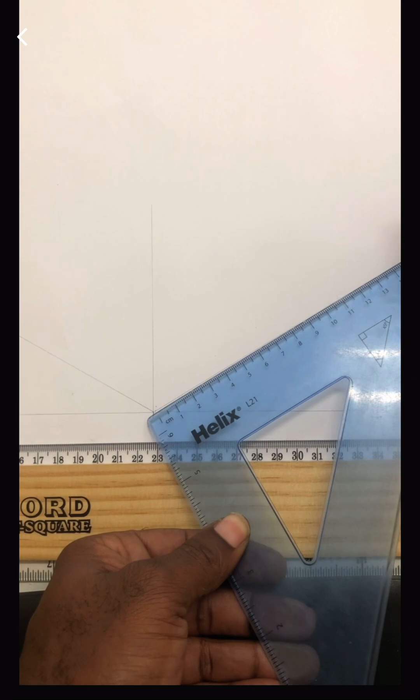Okay, now the line going to the right is going to be 14 centimeters, which is 140 millimeters. The line going to the left is going to be 6 centimeters, which is 60 millimeters. Place a point at 6.

The height of the base, we're constructing the base, that's 20 millimeters, which is equal to 2 centimeters. Get that receding line. Make adjustments with your eraser. Another receding line going to the right.

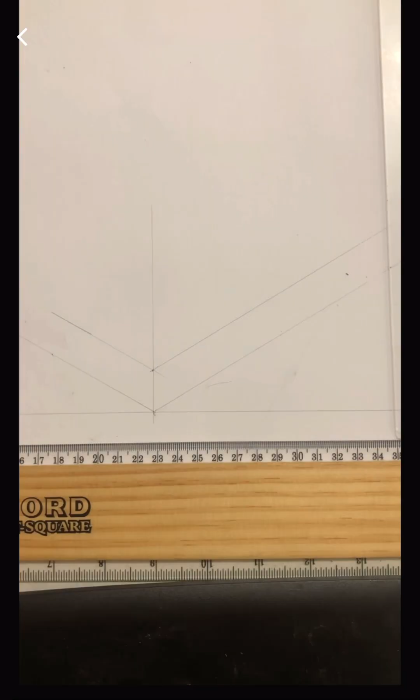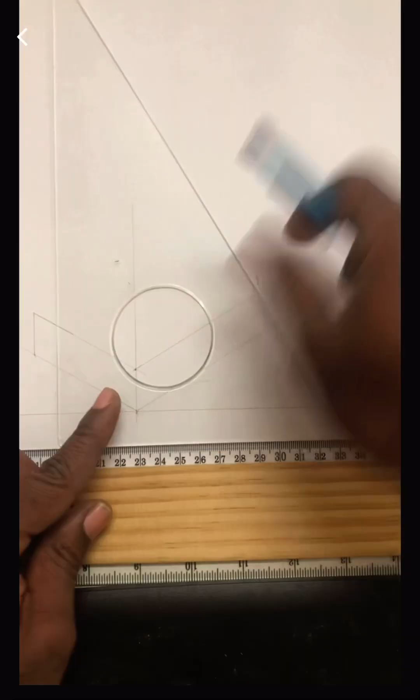Draw a vertical line intercepting that receding line from that measurement you have there, which is 14. One from the 6. Vertical line intercepting, creating the base. Draw a receding line from corner going to the right, one going to the left. You now have the base.

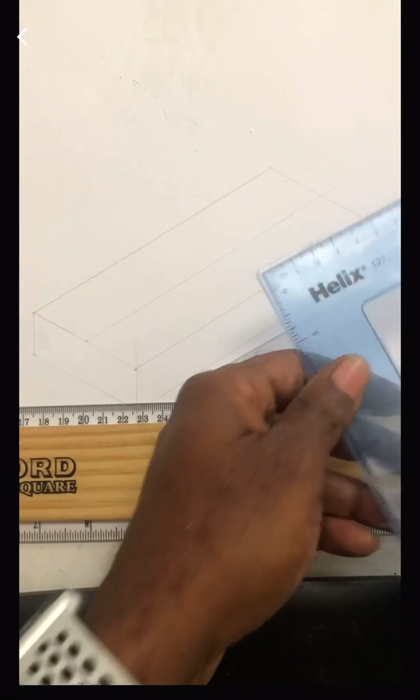Find the center, which is 3 centimeters. Draw a receding line, which is the center line. From that end, measure 4 centimeters. Get your scalene triangle, draw a receding line. Measure from the center, 20 on that side, 20 on that side. Draw a receding line from those points.

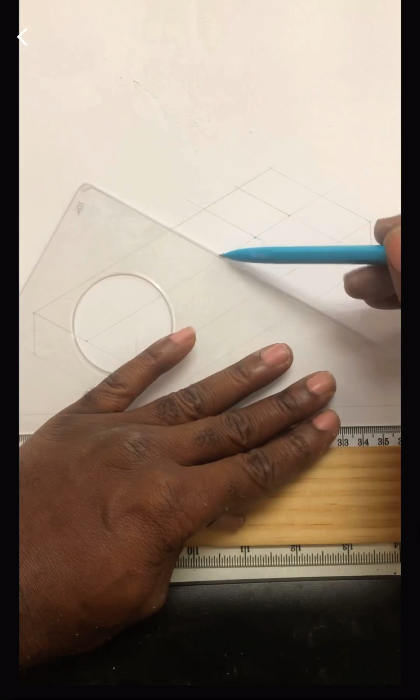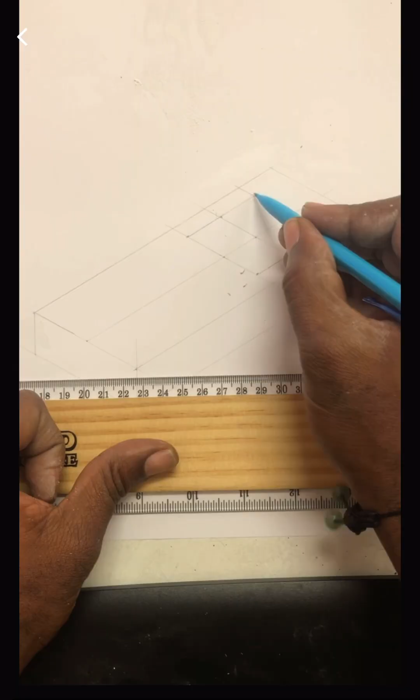We're going to measure another 20 from the center point on both sides. Put your 20 from the center, 20 from that. So we end up with that square in the center. All 4 corners. Isometric square. Make adjustments with your eraser. You can clearly see that isometric square. That's where we're going to use our circle template to get the isometric circle in the center.

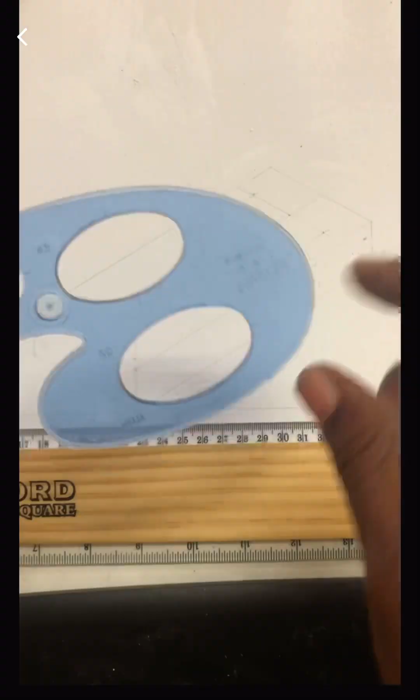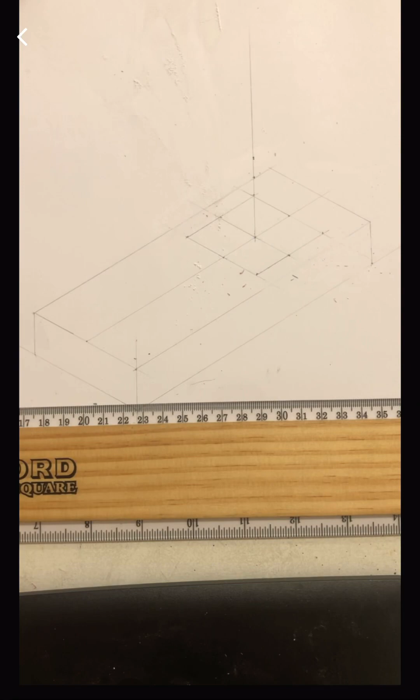Alright, that's an isometric template, has isometric circles. We're going to draw vertical lines from the midpoint going up. We're going to measure 3 centimeters and then 4 centimeters, but the maximum height is 4 centimeters. That's 3 centimeters from the midpoint going up and the 4 centimeter mark. So place a point on that vertical line, make adjustments.

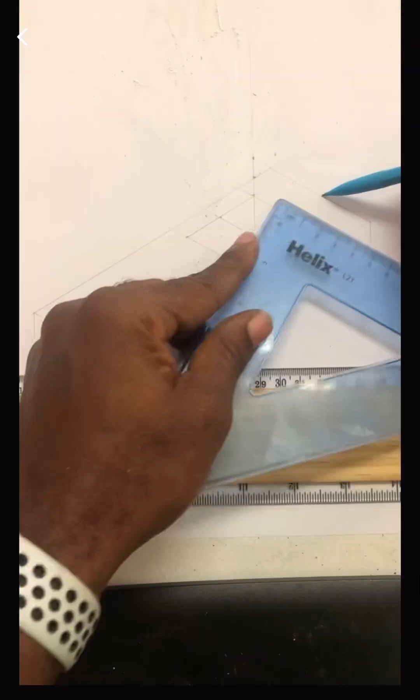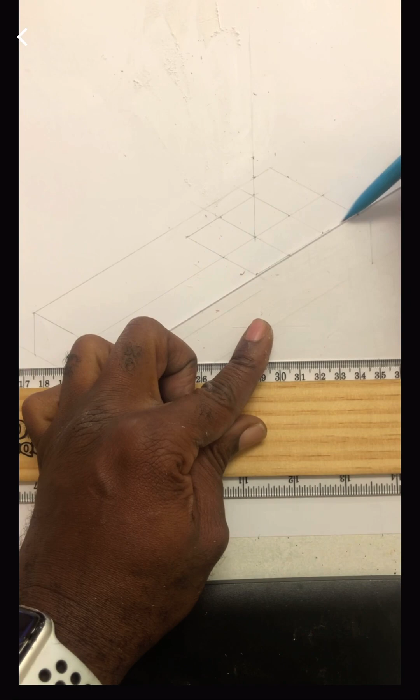We're going to create center lines on those points that we make on the 3 centimeter mark and the 4 centimeter mark. Alright, move to the front. From the center point, make lines. We could have just extended the receding lines from this end of the square right there. From that point, vertical line measuring 2 centimeters going down. Measure 2, place a point at the 2, make adjustments. Extend that line going backwards.

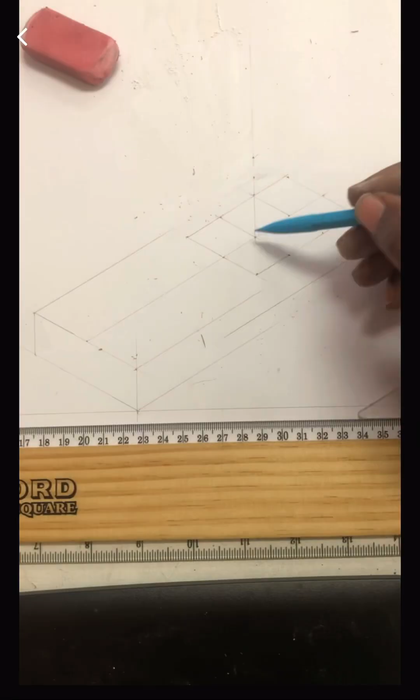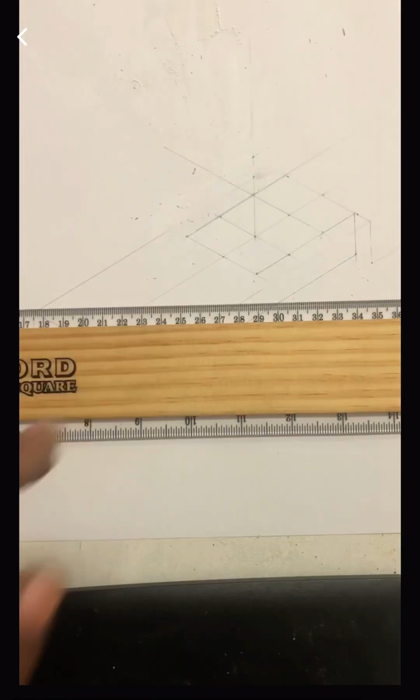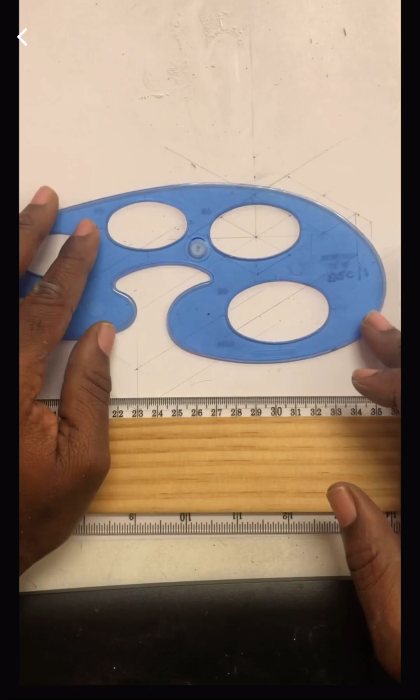Okay. So we're going to draw center lines from that mark on the vertical. Testing it with the ellipse template. You notice you have some marks on the ellipse template. You have to fit those marks. So we're going to draw a horizontal line inside the isometric box. Those two marks will match that horizontal line, and the vertical line will be matched with the vertical marks.

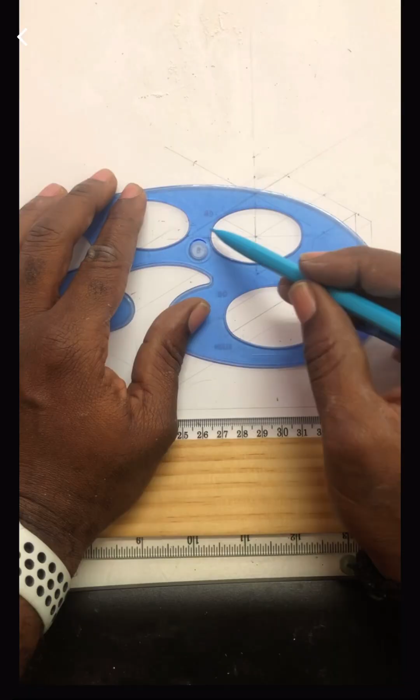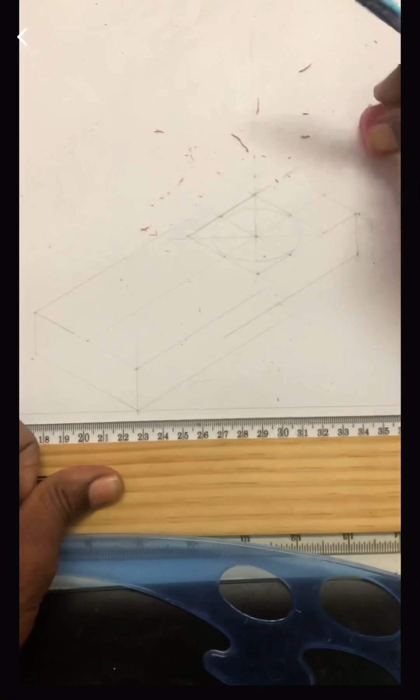Extending that line, so we're going to match that horizontal line with the horizontal marks, and the vertical line with the vertical mark. We're going to scribe our ellipse very lightly using construction lines. Make any necessary adjustment. Trying to clean up the drawing.

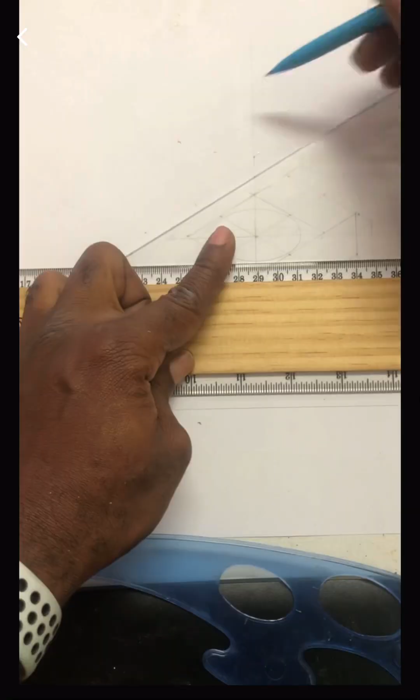Okay, so from that point, 3 centimeters, then from the midpoint, 4 centimeters going up. So we're going to create receding lines that represent the center of our circle. So we need at least 5 circles. Get your horizontal line from that point, match the horizontal line with the vertical line. Okay, as shown. Trying to extend that line going up so I have enough space.

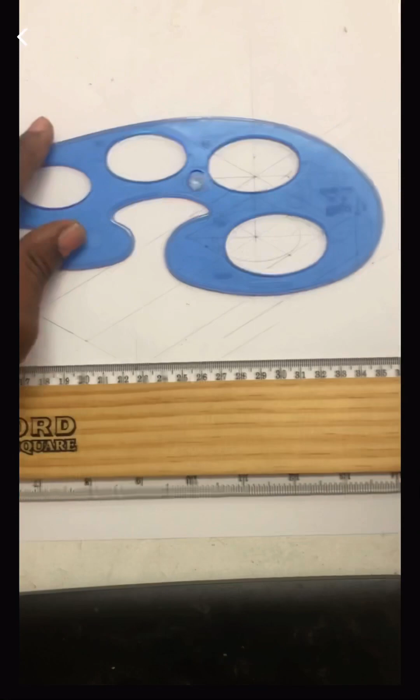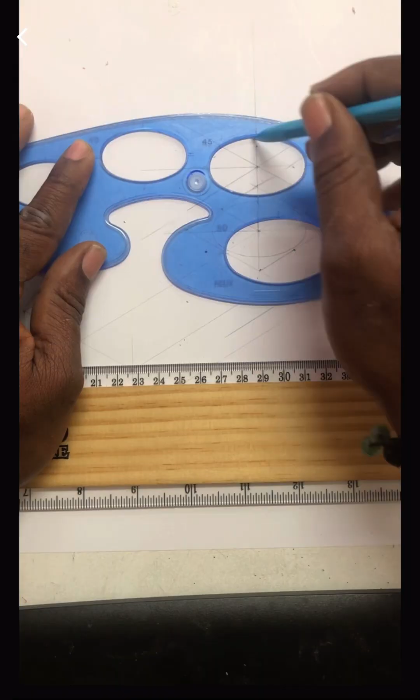So you match those points on the circle template with the lines that we have drawn, so you can get the circle in the dead center above the next one. Okay, good. So we have 2 circles. We have 3 more circles to create using those circle templates. This is 25.

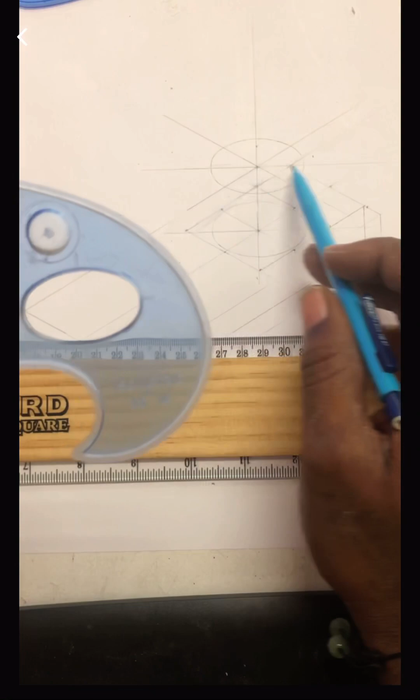So we're going to create a smaller circle. We're going to match those points again. We have 4 marks on the circle template, vertical and horizontal. So match the horizontal and the vertical. Scribe your circle lightly. You should end up with a circle inside of a circle. It's an isometric 3D circle. Okay, make adjustments.

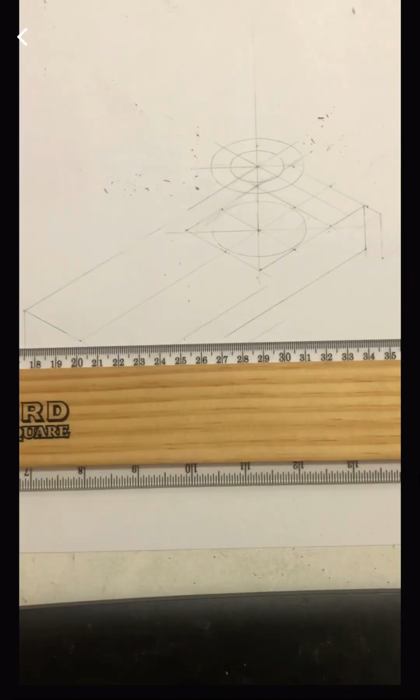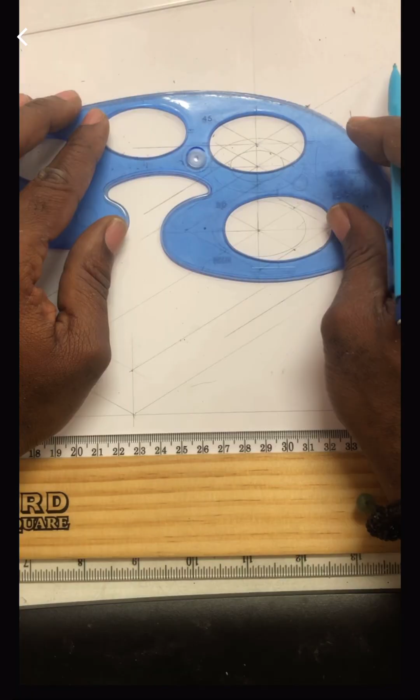So we're gonna go to the 4 centimeter mark now. Another set of receding lines from that point. You have to keep track of your lines though. Draw another horizontal line. We're gonna match that horizontal and the vertical from the 4 centimeter mark. Create another circle above those circles. Go in with your smaller circle template, match the lines again, just as we did previously.

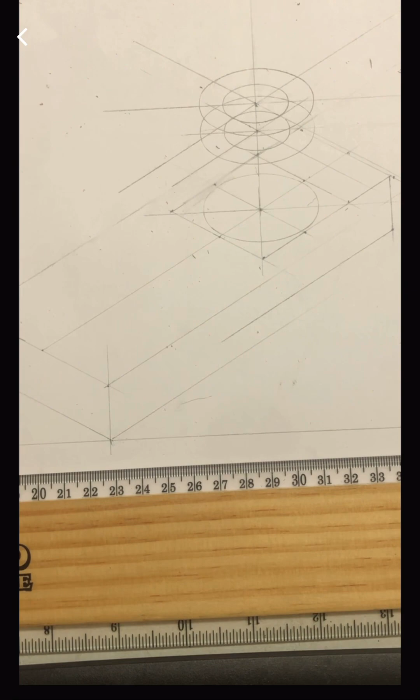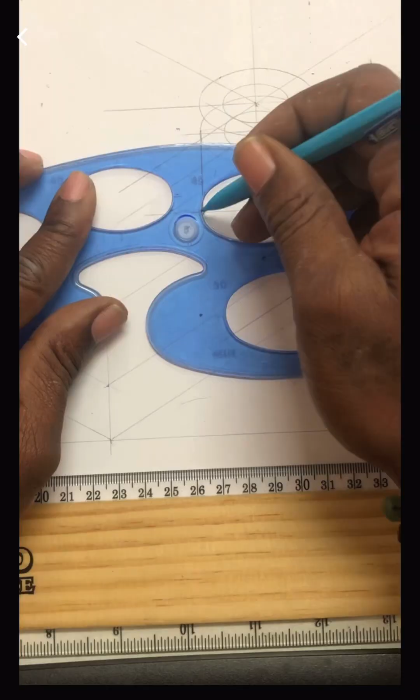Okay, so we have 5 circles now, so we're gonna make adjustments. From the edge right there, blend that circle with vertical lines so it appears to be a cylinder. I'm gonna go over, match the lines again, brighten that portion of the circle.

Why is that dog barking, bro?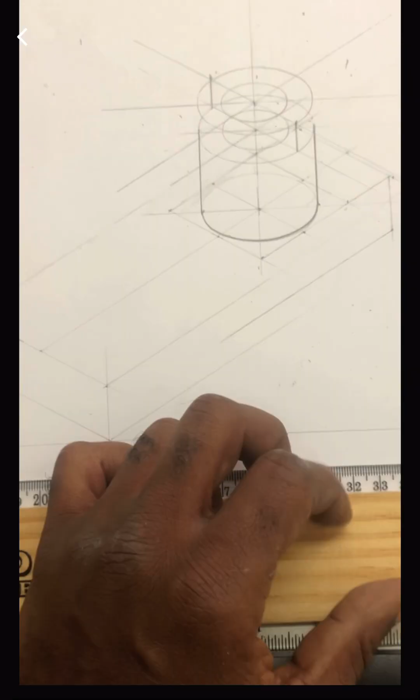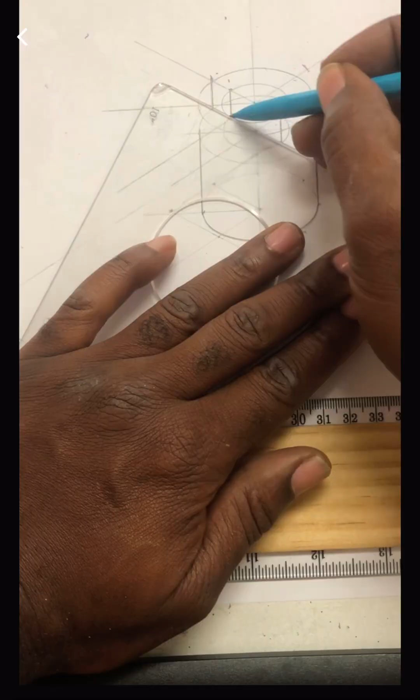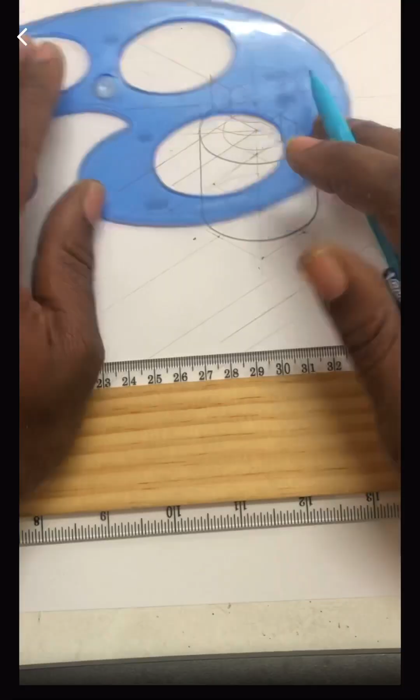Okay, from that center point, go vertical touching the first isometric circle. Do another vertical from the inside, from the small circle, touching that line and that portion right there. Okay, so we're gonna brighten from there, right there. And then move to the top circle. Wanna brighten all the way to the right there.

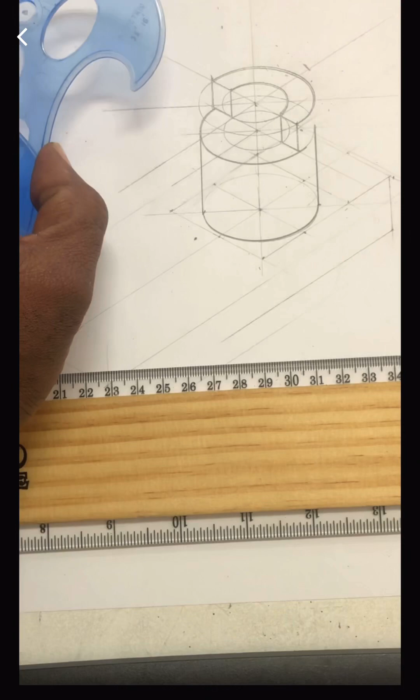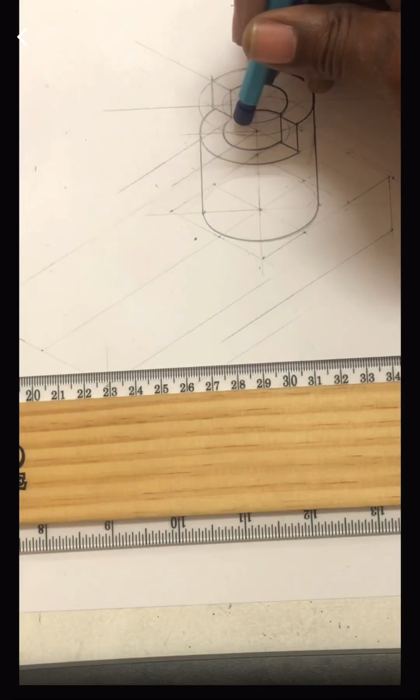Okay, let's use a smaller circle template. What portion are we gonna brighten? I'm just gonna brighten that half of the circle right there. Just half. And then we're gonna brighten, start from that point, go all the way around, right to right there. And make some adjustments. Okay, alright, good. Nice. You can make your little adjustments.

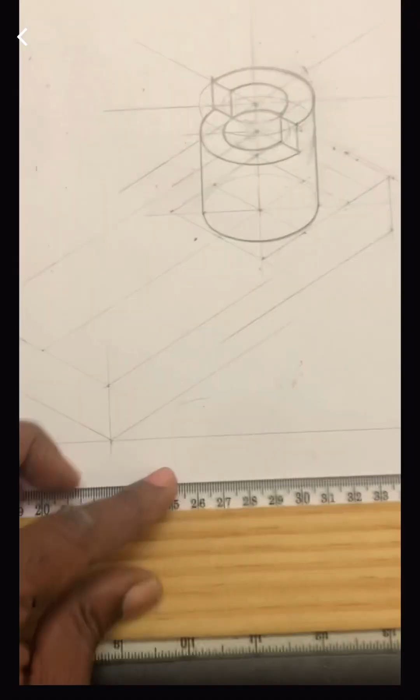Okay, so watch the video carefully. Measure 20 from that point. 5 millimeters on both sides from the center line. Draw a receding line right there. The slope has a thickness of 10.

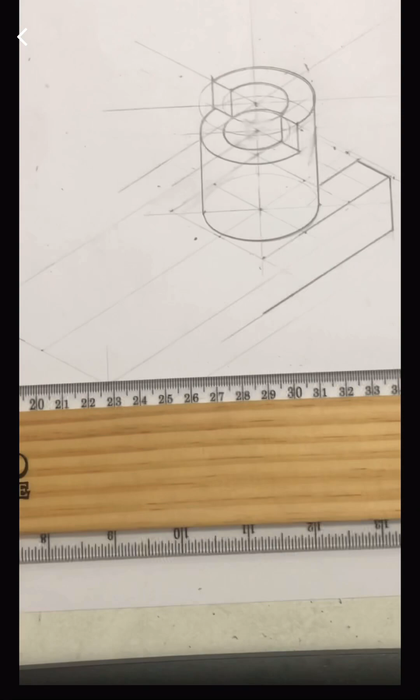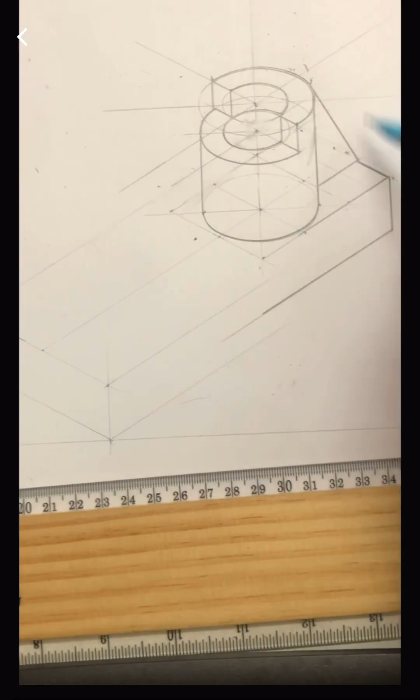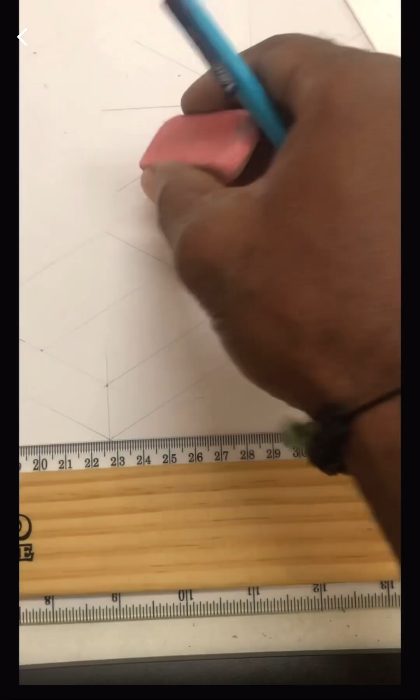Okay. From that center line at the top, we're going to measure 5 millimeters on both sides. Connect the slope manually with that 5 right there. Okay. Measure 6 millimeters from the left coming up. Adjustments where necessary. So from that point right there, 3 centimeters, draw your center line.

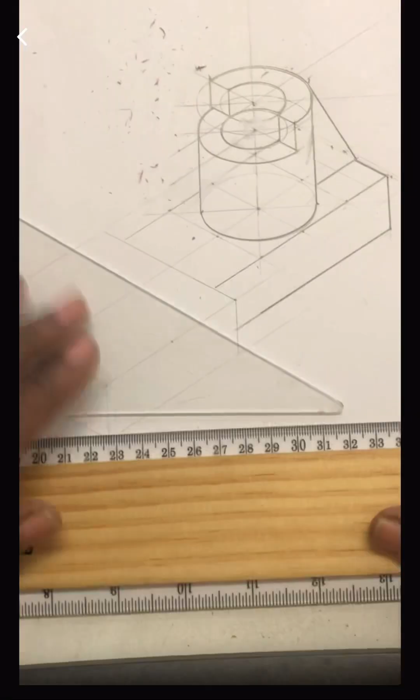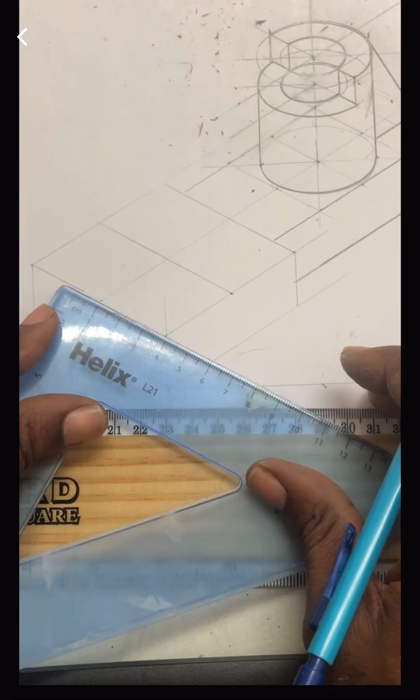Please excuse the noise, the background noise. The dogs are barking. I don't know.

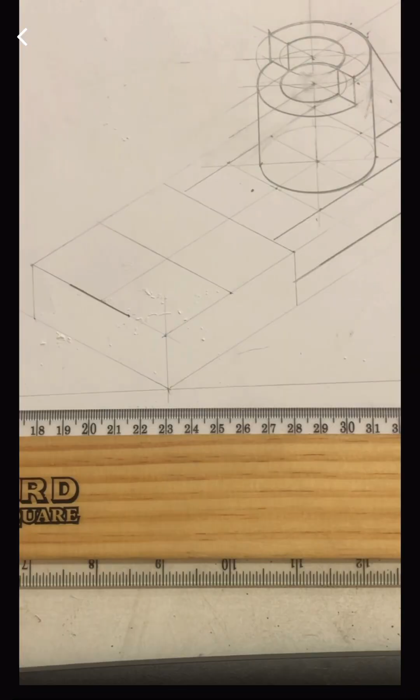Measure 3 centimeters. Okay, so from the center point, measure 13.5 on both sides. Brighten that side. We're going to use our compass to transfer those measurements on all 4 sides. It's just a shortcut. You could take the long route to measure using your ruler, but I decided to use my compass to transfer those measurements. So I was trying to use my divider. Then I said, nah. That's a divider. It transfers measurement, but I said, okay, let me use my compass.

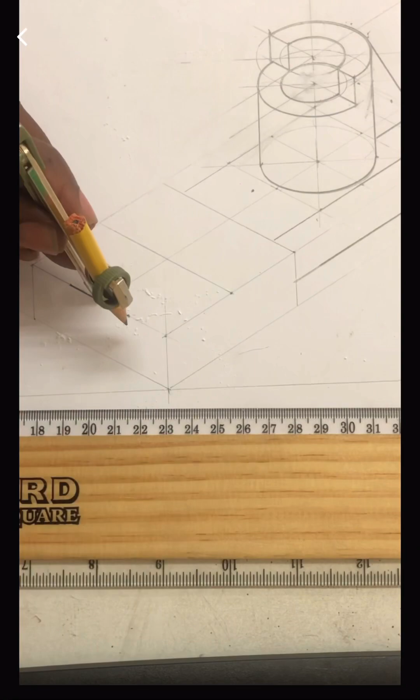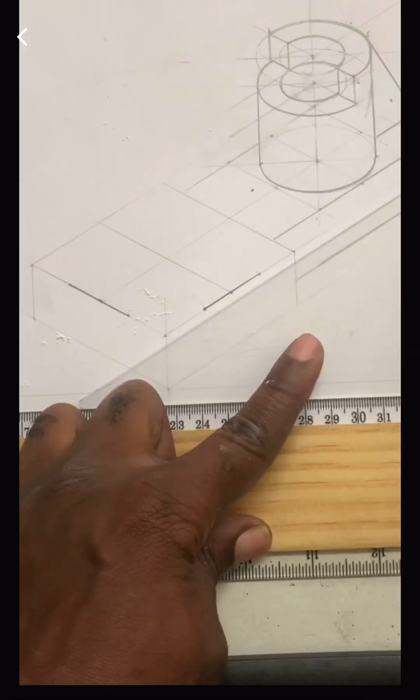So put your compass point on the center, open it to that half. That's half right there, put it on the center line. Scribe some arcs to cut the line so you can place a point on both sides. That line measures 26 millimeters. It should be 27, so it's 13.5 on both sides. Transfer those measurements on that line.

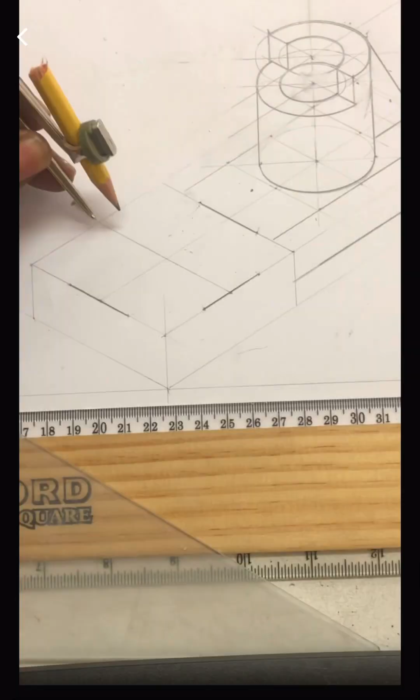Yes, welcome to Earth. You'll hear dogs barking and cars honking.

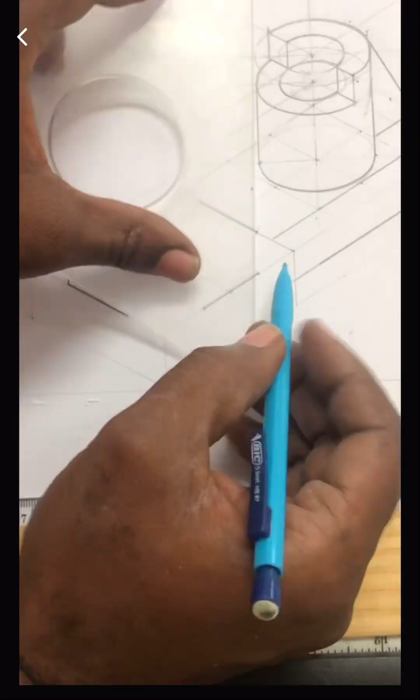Okay, we're going to connect those lines manually without the T-square because they are not at a 30-degree or a 60-degree angle. Draw vertical lines to intercept with that receding line. One there, another one, and another one. We're going to brighten that portion. Use our T-square to draw the horizontal line. Well, use our T-square to do that one as well.

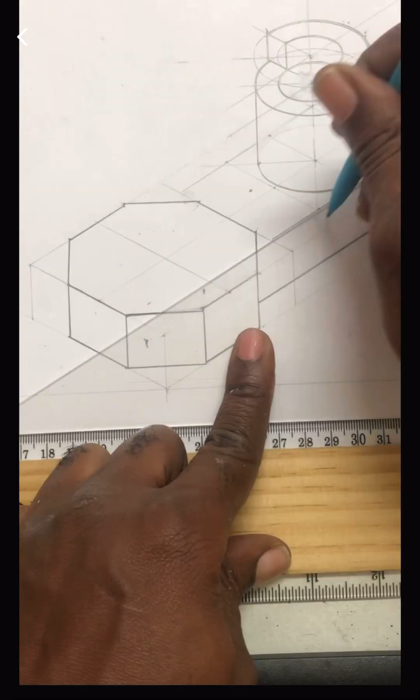I'm going to make some adjustments to that. Use your T-square. Get it across so it looks parallel. Receding line with your scalene triangle. Extend that line to intercept right there. Make your adjustments. Now we're going to create a smaller octagon on the top surface. Then we're going to transfer that measurement 5 centimeters above. So from that center point, measure 2 centimeters, 20 millimeters, same thing.

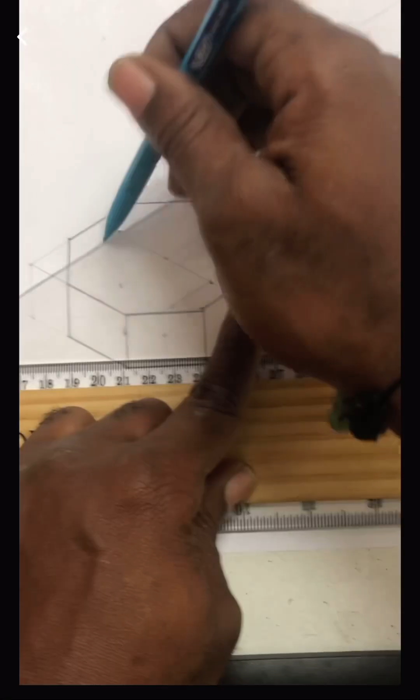Use your compass. Going to transfer that measurement, open it to that 20. You don't have to do it twice. Scribe arcs, small arcs on the center line. Then you use your pencil to create those points. You could do it the long way, as I said. Create an isometric square inside. Bam, bam.

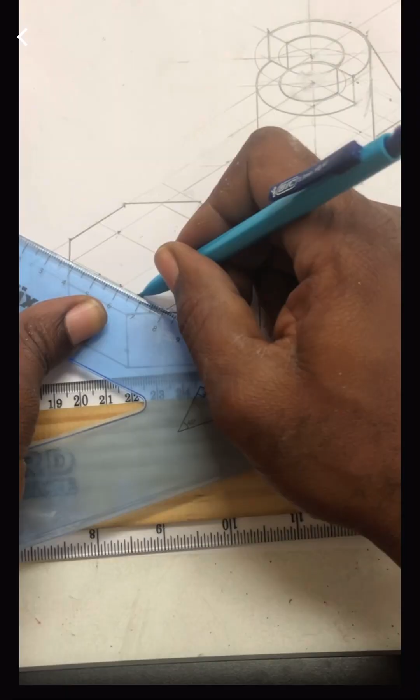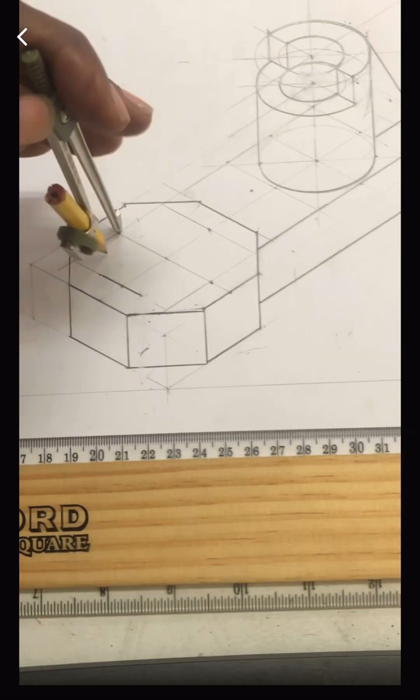Now, from that center point, measure 9 millimeters on both sides. So from that point, 9 millimeters going that way. From the center again, 9 millimeters going this direction. Brighten that line. We're gonna take the same procedure from the center point. Open your compass to the end of the line. That's 9 millimeters. Okay. Just making our lives easier here. Put it right at the center, scribe an arc on that line and on this line. Place a point both ends.

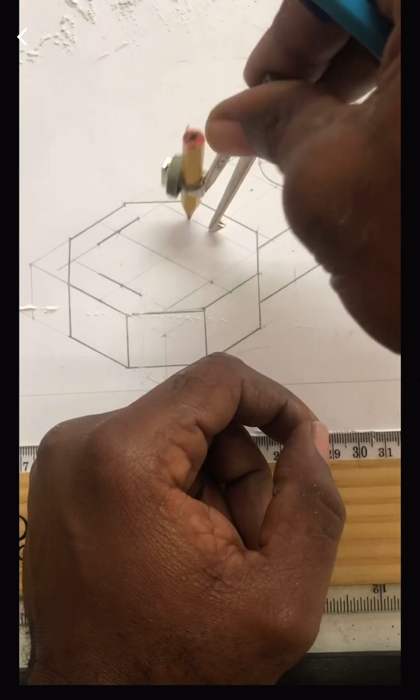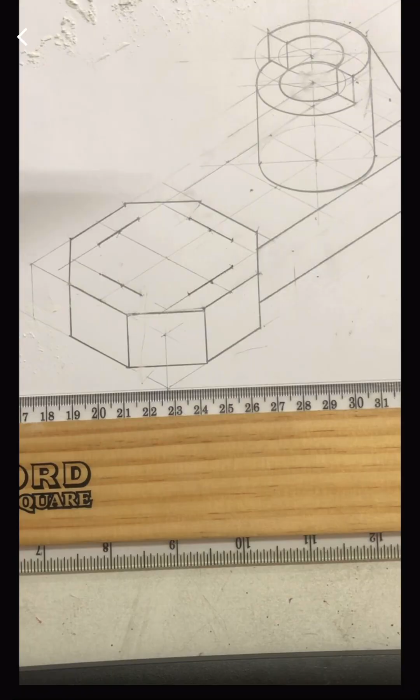So that line is 18 millimeters, but we had to split the measurement using the center line. So 9 millimeters on both sides. Use that center point. Scribe an arc, scribe an arc. Good. 9 millimeters on both sides. You could have measured it with your ruler, but I decided I'm going to take a shortcut. Always work using construction lines because you don't know when you're going to make mistakes. Connect those endpoints manually with your tool. That's the octagon right there. The center.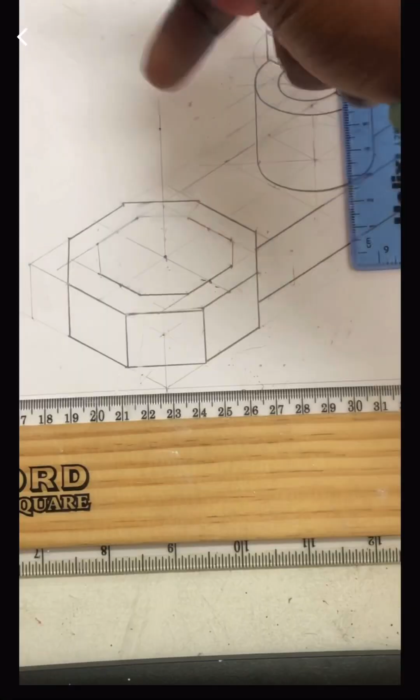Alright, let's move on. I'm just making a little adjustment so it's easier to unscramble. From the center point, you're gonna go up 5 centimeters. Measure from the center point there. Going up 5. Place a point at that line. Erase any extra. I'm gonna create another set of center lines on the 5 centimeter mark. So slide your scalene triangle both directions.

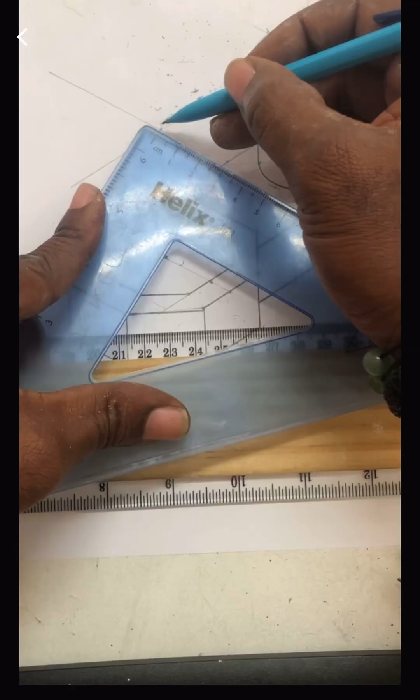Right, from the center point, we're gonna measure 20 millimeters on all sides. So from that center point, 20, just like what we did for the one below. Make some marks, open your compass to that 20 so you don't have to measure twice, just transfer that measurement. 20 on all four. Construct your isometric square. Make adjustments. So we have all 4 corners right there. Make adjustments.

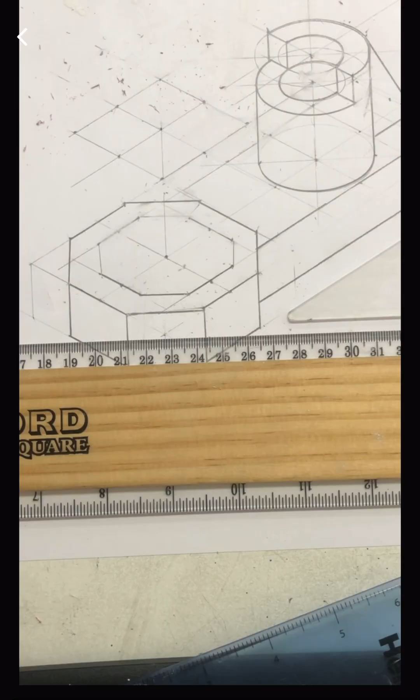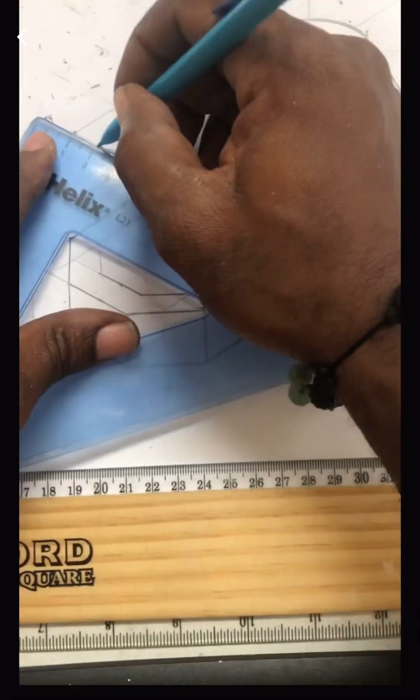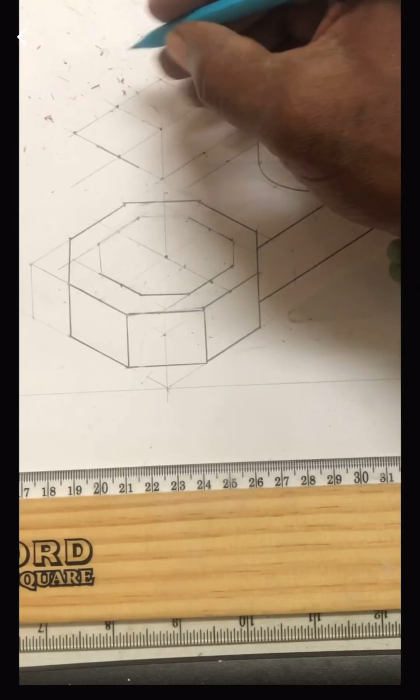We're going to construct a second octagon. So you can measure from the midpoint 9 millimeters on both sides. Get your compass, put it in the center, open it to half of the line, which is 9 millimeters. The compass right there. Swing. Swing. Okay, do the same on all four. Place a point, place a point. Your scalene, brighten that line. Both sides. Brighten that line.

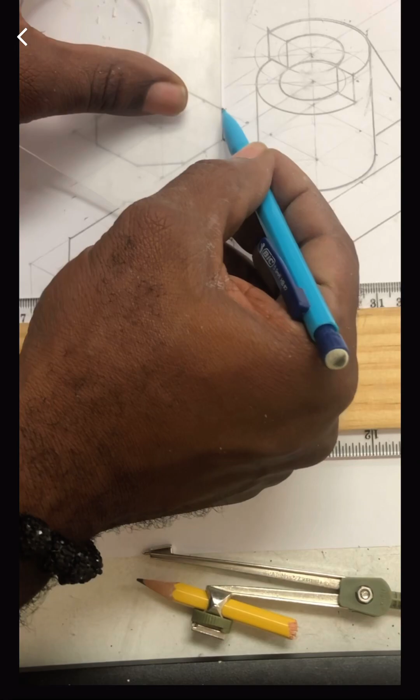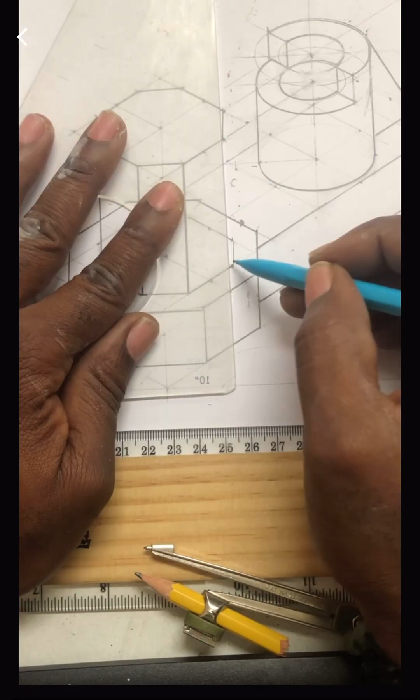Then we're gonna connect the endpoints. Just like that. One like that. One like that. And that one. Then we're gonna connect the corresponding ends so we can form our hexagonal prism. Sorry, our octagonal prism. It's a prism. If it's not matching, do it manually. Use your straight edge if it's not matching with your T-square; they should correspond. So I shifted the T-square a bit because it wasn't corresponding.

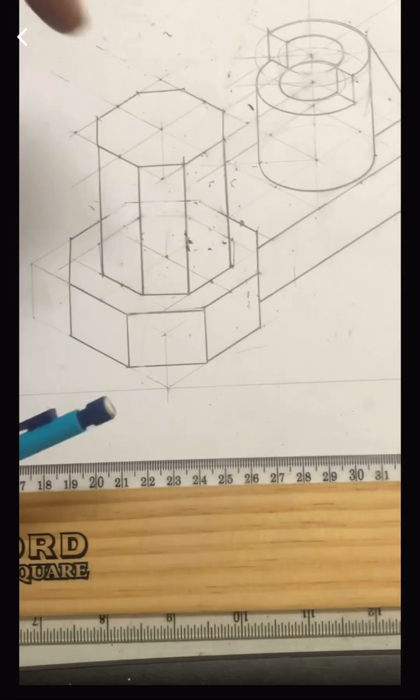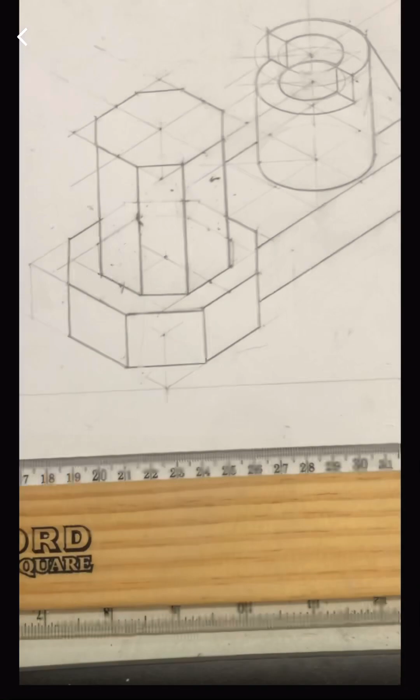No, nothing is perfect, and I guess that's the finished product right there. Make your adjustments, erase some of the lines on the inside so it appears to be a solid object. Brighten those lines.